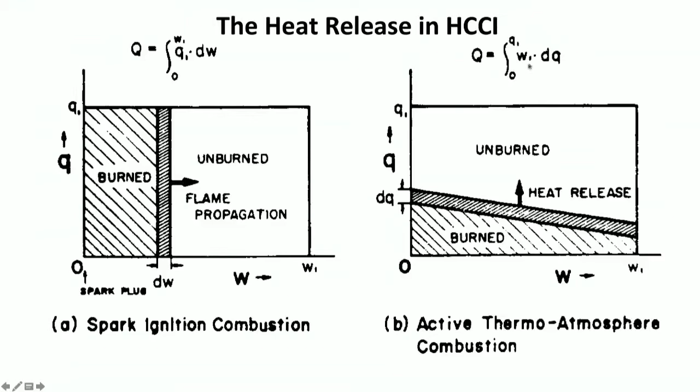So locally, reactions are fast, but the reaction front takes some time to get moving. So here to the right, it's what Onishi called active thermo-atmospheric combustion, ATAC. That's, by the way, what we called HCCI back in Lund the first 5-6 years before deciding on using the HCCI term. So here it's the same amount of heat, capital Q, integrating from 0 to q1 of w1 dq. So we integrate from bottom to top, and this tells us that things are happening all over the place - so it's a distributed reaction, no flame propagating through the combustion chamber. Chemistry is slow - it needs to be slow, otherwise all the heat is going to be released at one instant of time, and that's not an effective way to operate an engine.

Trust me, tried it. So for chemistry to be slow, we need to dilute. We need to have much more air, much more residual gas, much more something else that absorbs heat from the chemical reactions - slowing down chemistry by adding more mass. You can see that Onishi did not draw a horizontal line - there is a slope here. So it's... enough, maybe I should activate this.

It's enough of a slope to show that in some parts of the cylinder, more things are happening than in other parts. So it's not completely the same all over the place. Some parts would react a little bit faster because temperatures may be a little bit higher, a little bit richer mixture, or something is promoting reaction rate there. But it's not really exactly here or there, it could be some opposite location, some other cycle. But Onishi drew a non-horizontal line to indicate it's not a fully distributed reaction.

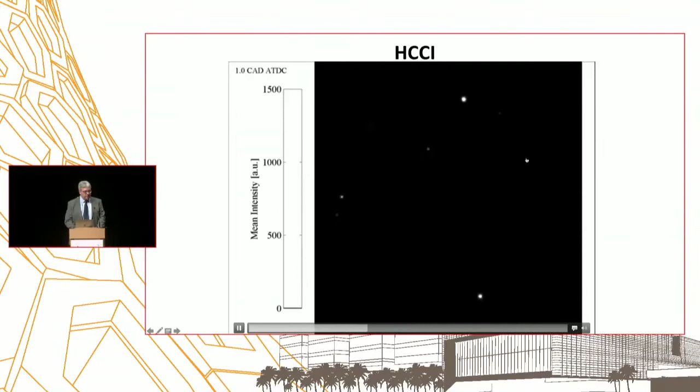And let's see if we can get the HCCI stuff working. Then nothing happens, because it wouldn't need to happen until it's close to TDC. You might see the number up there in the corner. And now it's about time to get started. You see it starts in one end of the combustion chamber, kind of does a loop, and burns a bit slower, actually, in the core of the combustion chamber. But distributed reactions seems to be the case.

So, what do we need to run HCCI? Well, we need temperature high enough to get combustion going, and then we need enough dilution so that once combustion gets going, it shouldn't blow up the engine. That's pretty much it.

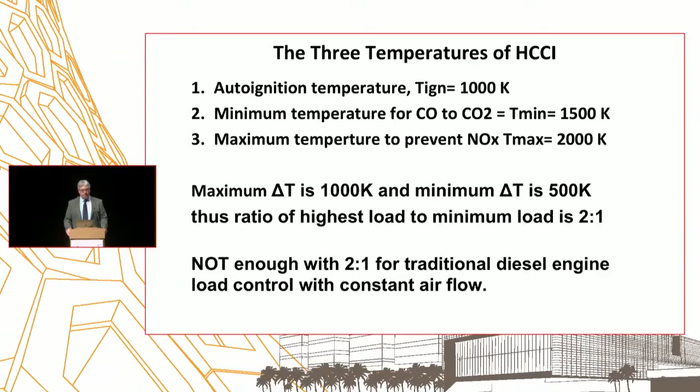So we can do really clean emissions, and then how about efficiency? If we want to operate our engine at part load, how should we do it to maximize efficiency? Well, we should burn fast at TDC. That's the ideal Otto cycle. It should be very lean. That's also good for the thermodynamic cycle, because the gamma, or ratio of Cp over Cv, would be high. We should have a high compression ratio, and we should operate very, very lean so we don't have any pumping losses. So we're doing all that with HCCI, so it's all good.

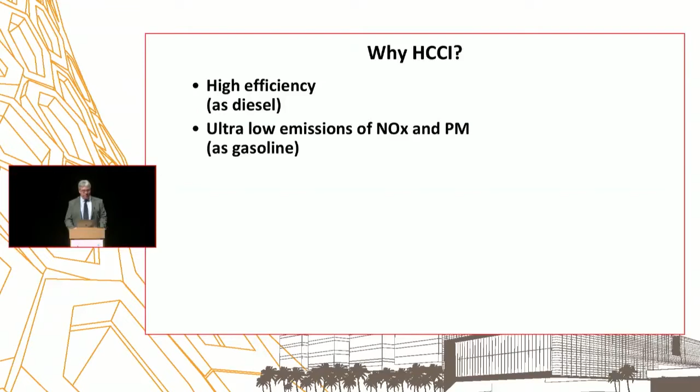So depending on who you ask, there will be different benefits. But it's kind of the best of both in one machine.

Oh, animation, question mark. Let's see if that works. This is an animation of HCCI. Let's do it like this.

And it means that this is pretty much a virtual HCCI engine. And what we're doing now is to set the different parameters that affect the HCCI combustion, so combustion starts earlier or later in the cycle.

So, when doing HCCI research, there are different ways to do it. You want to do thermodynamic engine studies, meaning you run a single-cylinder engine and you measure the efficiency, you measure the emissions, you're trying to understand why different variables affect the process.

With single-cylinder experiments like this, you could easily set conditions that would be totally unrealistic, and then get unrealistic results. Classical example: let's feed the engine with 10 bar pressure in the inlet, with no back pressure in the exhaust. Without burning any fuel, you get 10 bar work output. That's a really good efficiency—10 bar output without burning fuel. But it's totally unrealistic, so stay away from that.

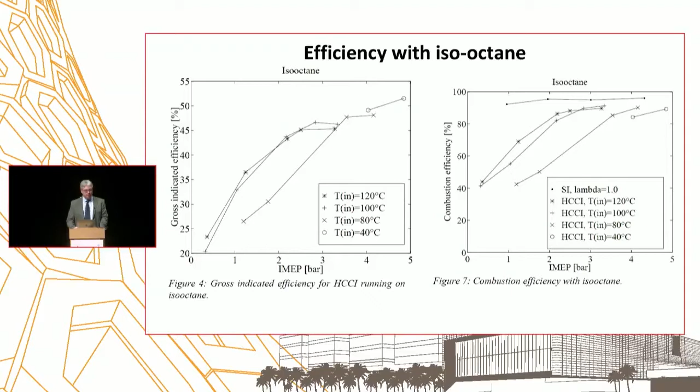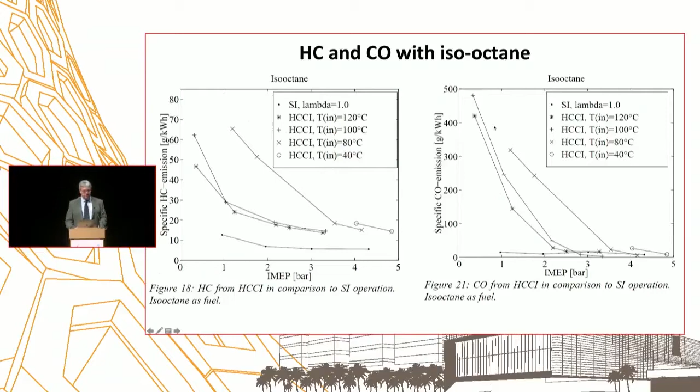So this would be the first experiments we did, and we just set a certain inlet temperature. We had a compression ratio that kind of worked, meaning the combustion phasing is totally random. This model I showed you was done way later, where we actually varied different combustion phasings and so on. Here it was only way early combustion, and that shouldn't be done.

So that was the first experience with HCCI, but it also gives you kind of a framework. Unburned hydrocarbon and CO would be high, NOx would be low, and efficiency would be high if you do it right, otherwise it's going to be a disaster. You've seen the free temperatures of HCCI before? Yes? Good. And that is still something that needs to be achieved.

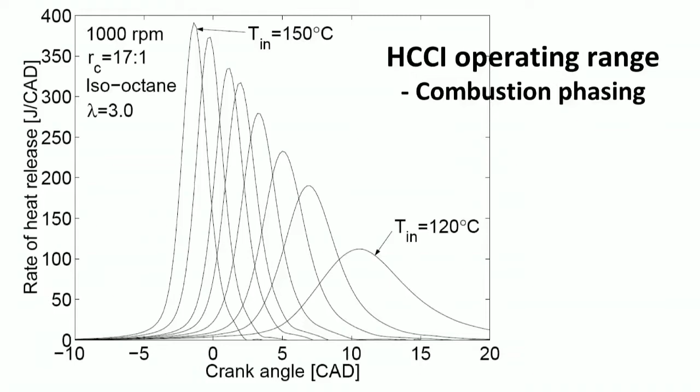Meaning that if we sweep the inlet temperature, combustion phasing will change quite a lot. This is a response from 150 down to 120 degrees in the inlet. It happens to be isooctane with a 17:1 compression ratio. So what this is telling us is that if we want a slow burn combustion, it should be a late burn. It also tells us that even if temperature starts to drop here at TDC, because as we compress, temperature goes up, and as we expand, temperature goes down.

But even so, there is something cooking here early in the process. So even with this very, very late combustion phasing, you release a little bit of heat before TDC, enough to get it cooking, and eventually it kicks in.

But the later you go, the more unstable it is. You saw that in the model - you get a lot of cycle-to-cycle fluctuations, because it's enough with maybe 1 degree C change in the inlet to have a really dramatic change in combustion phasing. So going early is safe, easy, but not as good. The better the control, the later you can go.

Combustion stability goes bad as you burn late. NOx drops as you go late, and unburned hydrocarbon and CO goes up. That's kind of what I already showed, maybe. So what's the optimum combustion phasing?

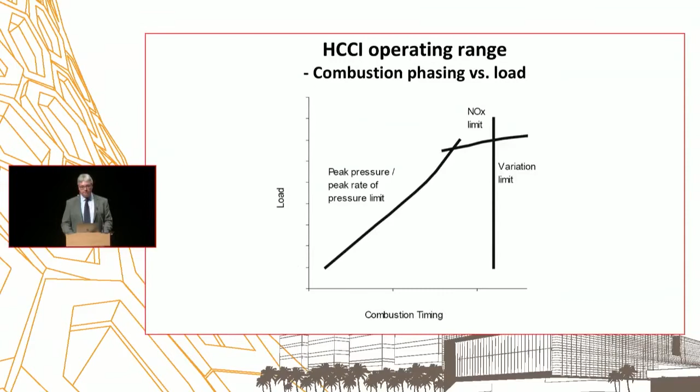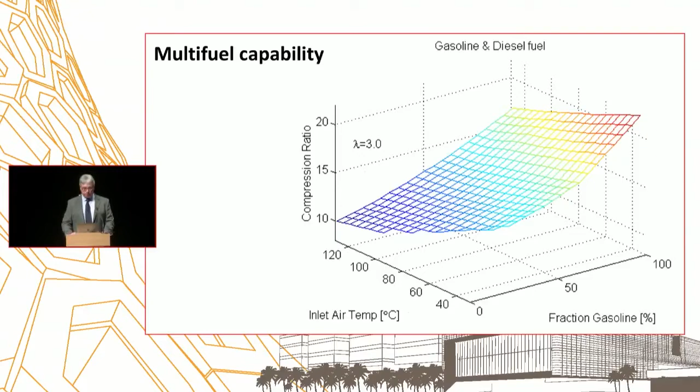The title of the slide says multi-fuel capability because if you adjust inlet temperature and/or compression ratio, you can run any fuel, right? Doesn't really matter if it's gasoline or diesel, you can burn any fuel. Any liquid or gaseous fuel - we didn't do any solids, I think, but yeah.

Hydrogen - at this time, 2004, there was a lot of talk about fuel cells. I'm not sure, maybe they're coming back, maybe not. It's batteries and fuel cells. Anyway, we decided to run HCCI with hydrogen. Is that a good idea? Well, the answer is, again, no. Hydrogen chemistry is very, very simple, so once the conditions are right, boom, and it's done. It's almost impossible to get late enough combustion phasing with hydrogen. It's very hard to get high efficiency because you're burning too early, and it's hard to actually get complete combustion, burning all the hydrogen with HCCI. But still, we did it - world first - but stay away.

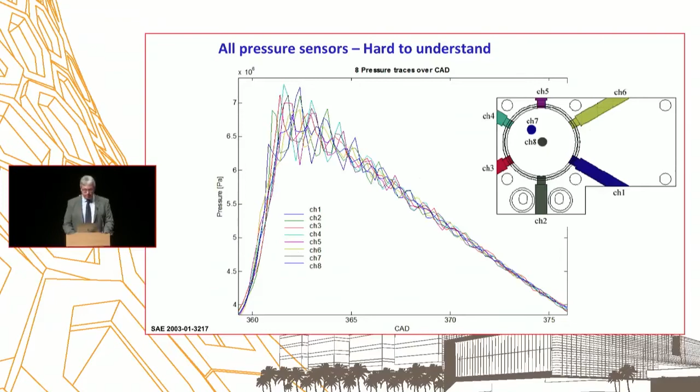So that's the conclusion. Well, the title says hard to understand. I possibly would agree. But if you look at a few at a time, like these 3 here, we see that they kind of go in phase. That indicates that there is a wave coming from the upper left to the lower right at pretty much the same time. And if we look at the other ones up there, they also go in phase. Again, an indication that the pressure wave goes upper left, lower right, and back and forth in that direction.

It's kind of interesting. This is one cycle, and that's a master thesis generating one cycle of pressure trace. Of course they did collect a few more, and if you look from cycle to cycle, you see that this is not at all the same process for the next cycle. Next cycle, it can easily be between channel 3 and 6, or it can be channel 2 and 5, or any other direction.

Totally random. But if we look at channel 4, 1, and 8, we see that it's really going in a very nice 180-degree phase. One goes high, the other one goes low. And we also see that in the middle, we measure a much lower amplitude, and we also measure pretty much twice the frequency.

By the way, this is really good to know if you want to get really high load from HCCI without too much pressure oscillations. What you do then is make sure that you fit the pressure sensor in the center, and you see nothing. We tried that and got really high load in a Scania truck size machine, just replacing the fuel injector in the center with a pressure sensor. That's the least sensitive position in the cylinder to put the sensor, and that also means for a certain maximum pressure rise rate, pressure oscillation, you can operate much harder.

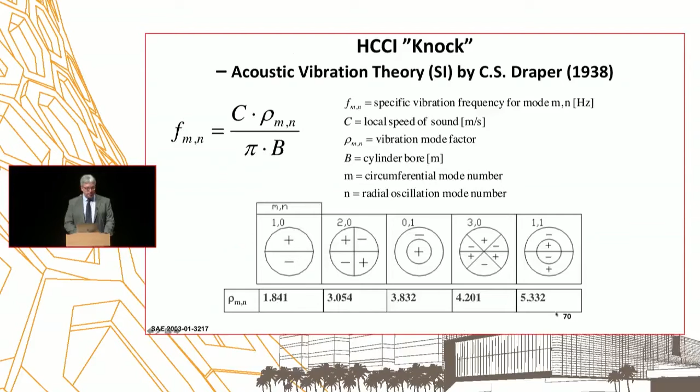Anyway, so this is the knock theory from 1938 from Draper, and there are different oscillation frequencies. You need to know the bore, local speed of sound, and I guess pi, as well as this mode factor. Depending on how the pressure waves go back and forth, you would then get the different frequencies. The lowest frequency here is this mode 1.0, just going back and forth like this, pretty much the mode I showed you, and is 1.8 here. Then you would see different modes depending on the complexity of the system.

This is the ringing index by James Eng. It's normally used to put a limit for any noise, and it's the pressure rise rate normalized by peak pressure, and then you have some temperature coefficients, saying that the pressure rise rate is more severe if the pressure level as such would be lower.

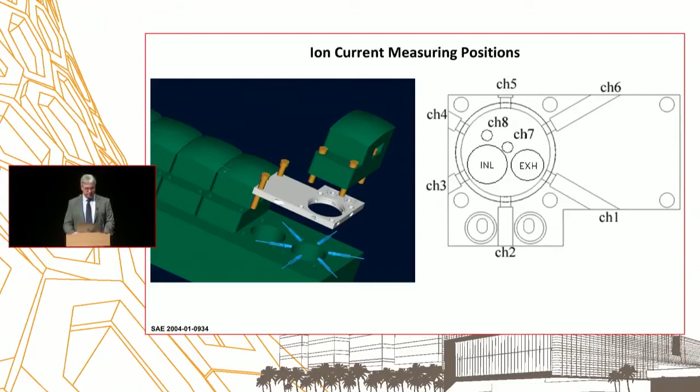So ion current was that - it's just to apply a voltage over the spark plug, and then you measure the current flowing as you change the conductivity of the charge.

Okay, basic studies, unburned hydrocarbon. Let's do that also before the break.

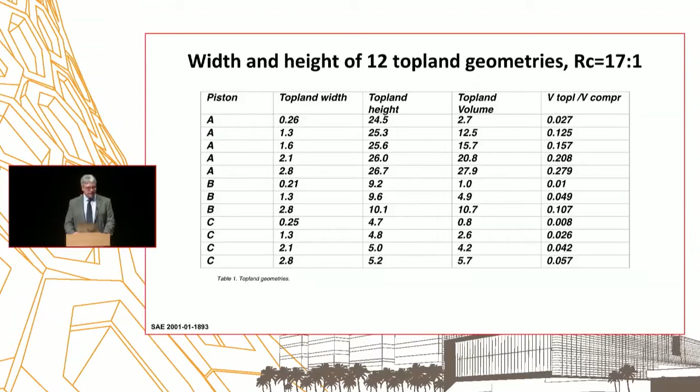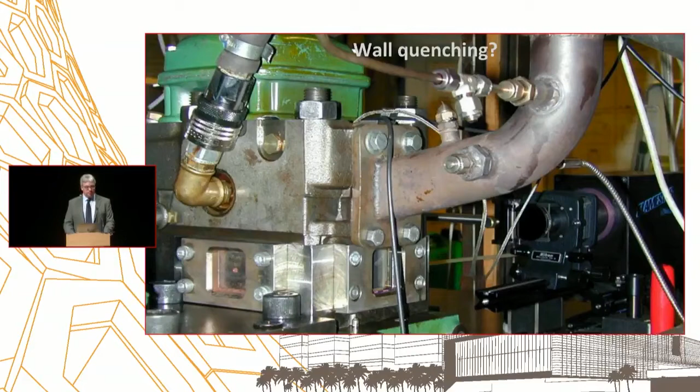So how about wall quenching? How can we measure wall quenching? Well, let's take some direct imaging.

So that's chemiluminescence. You only see that much with the camera. Let's do laser-induced fluorescence instead.

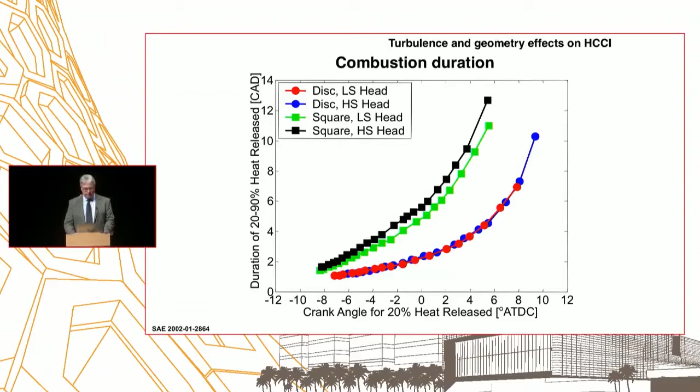So I can't blame the student. Then what? Time to think. It kind of hurts, but you have to do it, right? What can turbulence in the combustion chamber do to change HCCI combustion?

Could it be through heat losses? Could we be building up a different temperature field with different heat losses? If heat losses increase, the thermal efficiency should drop, right? So let's check that. Oops—the higher turbulence combustion chamber would have a higher efficiency with the same combustion phasing. Nope, so that wasn't really the case.

Okay, then what? What could it be? Could it be charge homogeneity? Turbulence is mixing, right? It's a good mixer. Could it be that the higher the turbulence, the more homogeneous the charge?

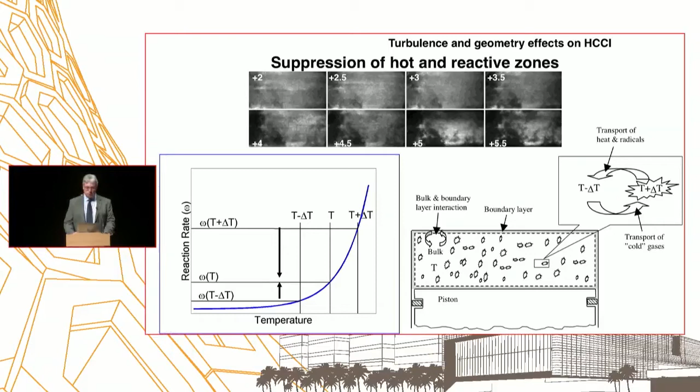Would that be a suitable explanation? Maybe. Why? How? What's happening? Let's do laser diagnostics. And I think this is possibly a really good time for a break.

How long of a break should I take? Ten. Okay, so back in ten.

So before the break, I said strange things happen in HCCI. Turbulence gives us slower combustion, and that's not expected. If anything, it would be nothing happening, or possibly a faster burn as in SI, but that's not the case. So let's figure out why, and there were some thoughts—most of them turned out to be wrong, but that's something that can be investigated once we look into the actual combustion process. And that can't be done with just chemiluminescence because we can't look into the combustion process as such; we can just look at the surface.

So what do you need to do laser diagnostics? Well, you need a laser, a camera, and an optical engine. In this case, it's a YAG laser with a dye, and just a camera set up for capturing a vertical laser sheet going through the optical engine. So that's the minimum requirement—those three components.

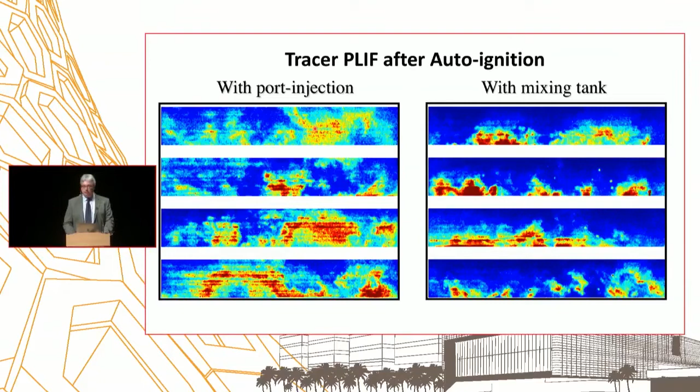This is fuel tracer LIF, and this is OH LIF, probing hot regions in the combustion chamber. Same story pretty much - there will be really high temperature zones with very steep gradients to zones with pretty much no reaction.

Why is this happening? Why does it look so totally random from cycle to cycle? How do we actually investigate the process? This kernel here, is it expanding? Is there a flame propagating? So is HCCI actually flame propagation? If so, why is turbulence reducing combustion rate?

The problem is that you can't really follow the average process. In spark ignition, you know combustion starts at the spark plug and grows, so you can do a sample average statistical analysis. If you take the average of all cycles, it will be just a homogeneous signal - a smooth surface. So on average it's really distributed, but a single cycle is not, and we can't follow the local individual process without a cycle-resolved measurement.

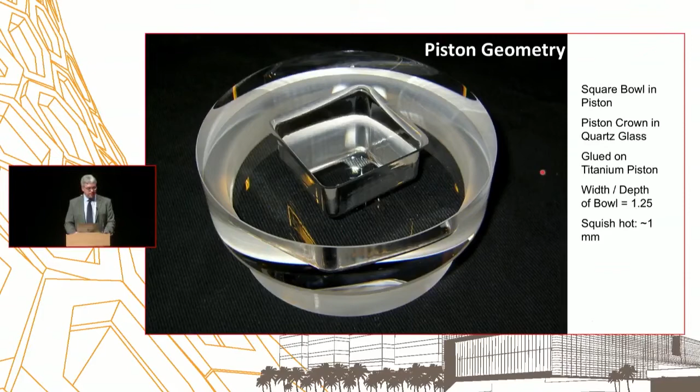Anyway, this is the pancake geometry, and the high-speed video is the same as shown in the introduction. It starts in the lower left corner roughly, and then progresses - you can see it here - then more signal will be in the center before completion.

These are the snapshots, and we can see it start here in many different locations - this is one single cycle. The next cycle will look different. You can see pretty much a hole in the center, then more of the signal in the center, and then it's done. The combustion process is in the range of maybe 10 degrees crank angle or so.

This is with the bowl, and here something else is happening. It actually starts in the corner, and then it's progressing, doing pretty much one revolution in the bowl. It starts in a spot and moves the reaction zone, and only very late in the cycle do you see combustion outside the bowl.

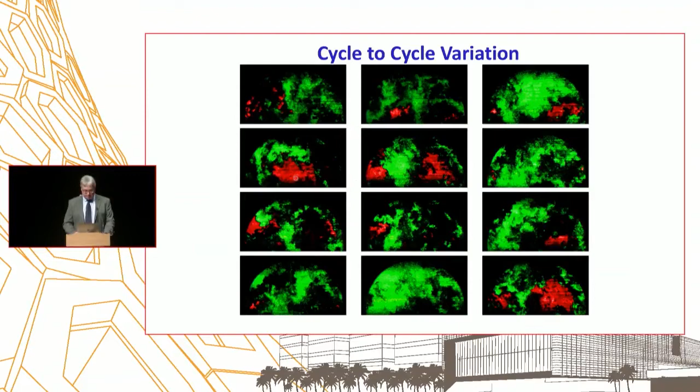Right, Hong? Good. So this is cycle-to-cycle variation, still experimental data. This is formaldehyde, and this is OH. Just showing that in a dozen or so different cycles, it looks very different. Why I'm showing this is because it justifies not using RANS type of models.

Combustion is not homogeneous. Again, this is experimental data, formaldehyde and OH, and this is the formaldehyde in the LES simulation and the OH, and also the temperature field, showing that it's not at all a homogeneous temperature field with HCCI.

Okay, all good. This is just to show that you see these structures also visible in the experimental measurements. So what's this? This is a progress variable of some sort, showing that here, the red, there is a lot more reactions ongoing or actually completed.

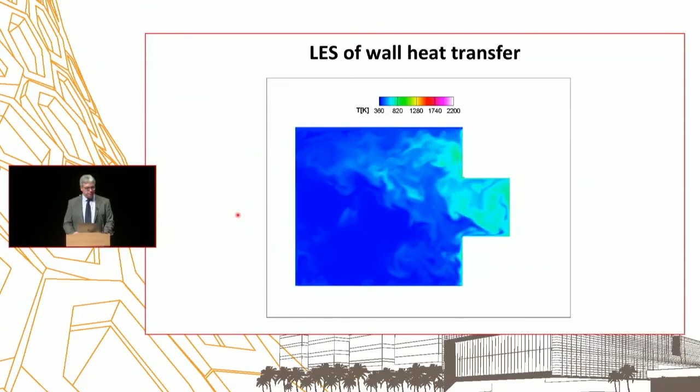So that was the final conclusion, why this strange combustion chamber is actually giving you a slower burn, behaving pretty much like SI. So this is the LES simulation of the same as the high-speed video, and we see it starts in a corner. For some reason, it starts in the lower right instead of the upper right corner.

We spent quite some time trying to figure out why the CFD predicted the wrong corner. Turned out to be kind of an easy way to explain it. This is looking at the combustion chamber from above, and the measurements were done from below.

So it's actually the same corner, but different view. Okay, enough of that. Let's do some closed-loop combustion control. I said without it, the engine explodes in a few seconds. Why do we want to do closed loop control? We want to burn as much fuel as possible to get a higher load of HCCI.

So this is kind of the limit, and this is something I showed previously. If we burn late, the burn rate is less, and that means we can go up in load. So let's phase combustion late. But that also makes the entire system very nervous. So we need to measure what's happening, and we need to adjust something for the next cycle so we stabilize.

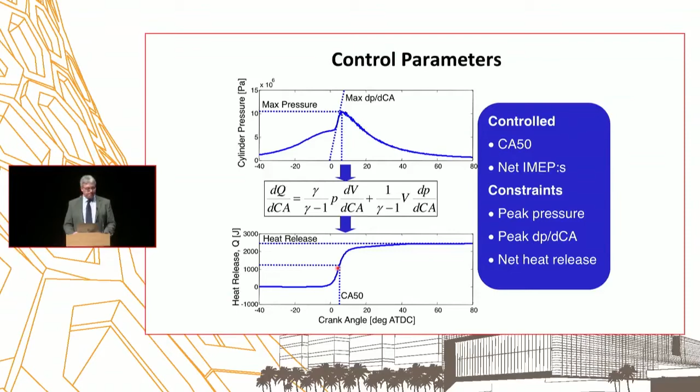So, how can you control the HCCI? Well, you can do this dual fuel, meaning blending isooctane and n-heptane. So this is done here in a Scania multi-cylinder truck engine.

You can do variable valve timing, meaning that you can change when you close the inlet valve, and by that you effectively change the compression ratio, the effective compression ratio. You can also change how much you trap residuals with the valve timing. I will show that a little bit more in detail eventually.

That's done here in a Volvo car inline 6. The previous one was a Scania truck. And this is with the variable compression ratio and inlet temperature control.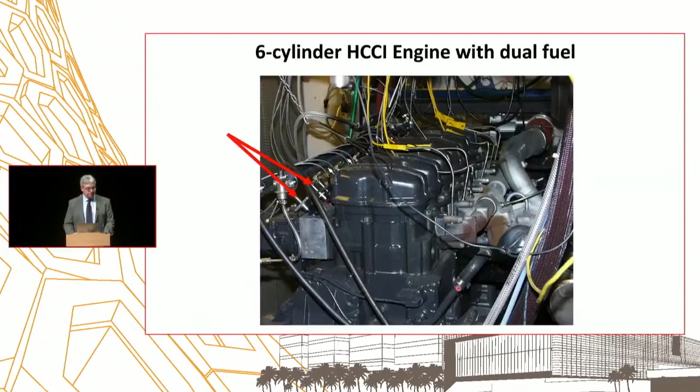That's roughly 90% of the diesel engine peak power. Without closed loop control, the maximum load will be around there, roughly. So you do not try to go high load without closed loop control, you're simply not fast enough to control it yourself. And if it's a 6-cylinder engine, you need 7 students to control it - one per cylinder, and the 7th one to control inlet temperature. I don't see that happening easily.

So this is a typical cycle with this closed loop control, 20.4 bar IMEP and 17 bar net with gas exchange. We're hitting 200 bar peak pressure because the engine supplier, Scania, told us not to go above 200, so of course we didn't - too much. This is of course the published data. There were some excursions to 250, 300, and yeah.

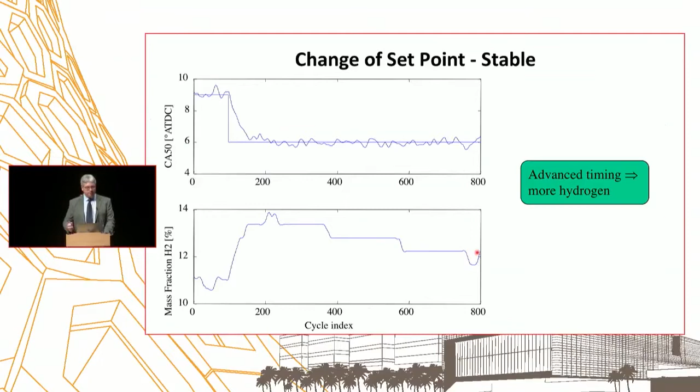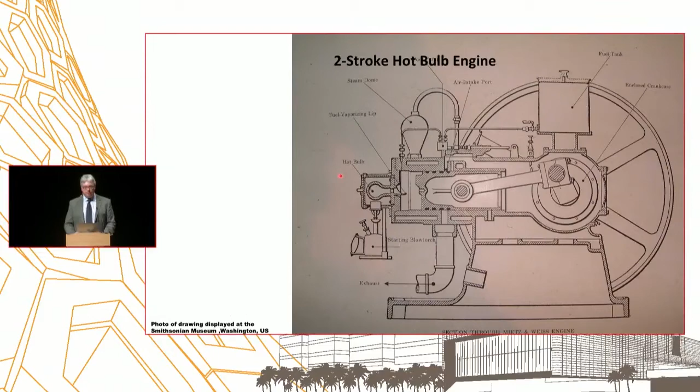But it was very robust and worked very well. No spark plug that fouled, and it could burn cheap fuel like kerosene or naphtha.

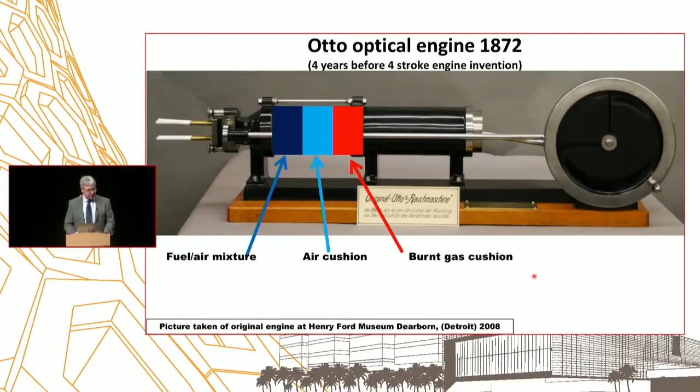Diesel, the other guy, when he did his experiments, concluded that combustion started when reaching 20 atmospheres pressure. That was a bit of a surprise, since that was during the compression stroke, and he injected fuel at TDC - so combustion started before he injected fuel.

He tried a few times, and if you try and try and try, you add fuel, you add fuel, eventually you have enough to do HCCI. So diesel almost got killed by the HCCI engine, in a sense that the combustion got so violent the safety valve flew off and landed in the wall, half a meter away from diesel himself. If he would have been in that location, I guess HCCI would have killed diesel.

Okay, enough of that. Let's look at some more practical paths. A lot happened in 1998. Honda released their commercial 2-stroke running HCCI. Nissan released the MK combustion concept - K stands for Kimura, I still don't remember the M. Kimura himself was here a year ago giving a talk at KAUST. Unibus was released by Toyota. Ford presented a concept with OKP, and the VCR thing with Saab together with Lund was at the same time.

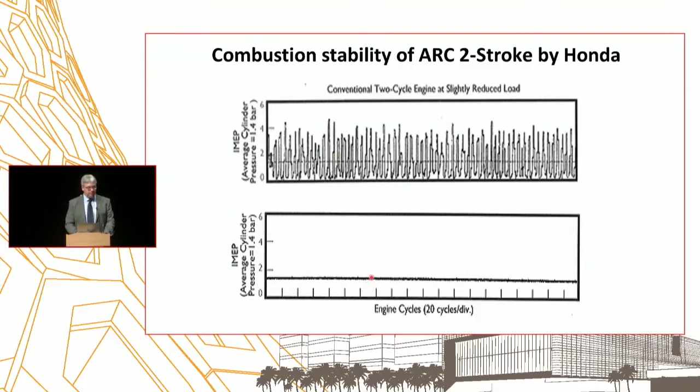Okay, so this is combustion stability. This is the standard SI combustion, and this is HCCI. As you can see, it's very much more stable with HCCI. So we didn't trust Honda, so we took one of those, and this was a master project.

So take the scooter, mount it in the test bench, add an emission analyzer, and then measure the CO, NOx, unburned hydrocarbon, and the fuel consumption. And yeah, we got kind of the same numbers as Honda. So seems to be about right.

This is just a zoom in, and sure enough, the NOx level - there is no major difference if you do SI or HCCI. Fuel consumption is improved, but the main conclusion is there is no NOx benefit doing two-stroke HCCI. Unburned hydrocarbon is 30% less, but still high, and much better combustion stability at low load. Brake efficiency is improved, but it's still less than 20%, so who cares.

It's not good. Then someone got the idea of, if we can do this in a two-stroke, how about doing it in a four-stroke? So how about converting a four-stroke engine to the same conditions as ARC?

Let's keep the compression ratio about the same. Let's not heat the inlet air, but let's trap a lot of hot residuals by closing the exhaust valve early and opening the inlet valve late. It's called negative valve overlap, meaning no valve overlap. Doing so, we trap hot residuals and get the same in-cylinder conditions as the two-stroke. The only thing we need to do is change the valve timing, and then a conventional SI engine, all of a sudden, will be HCCI.

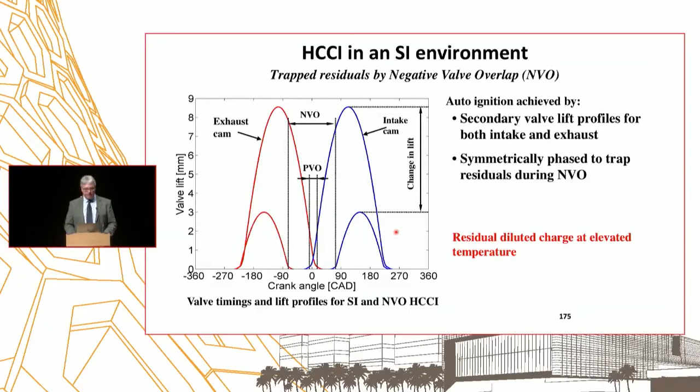You can also convert gasoline to diesel by injecting fuel at the wrong TDC, because if you close the exhaust valve, you get a recompression.

That means at the wrong TDC, temperature and pressure are fairly high, not quite high enough for combustion, but high enough to get the fuel cooking a little bit. So if we inject the fuel here, we actually convert the low reactivity gasoline to high reactivity, something diesel-like. So if we inject a certain amount of fuel here and the rest where we normally do, we can balance and adjust the fuel quality by simply selecting when and how much we inject the fuel. And then we have another control variable.

So that seems to be doable. We tested it in this inline 6 and concluded that, yeah, it's kind of possible, but you either get 4-bar IMEP at 1,000 RPM or 1 bar at 4,000 RPM. So it's kind of the same power.

Why is that? Well, it's because there's really one setting that gives you the right balance between dilution, meaning burnt gases, and temperature from the exhaust. And that's pretty much only one power rating of the machine. So IMEP times speed gives you power.

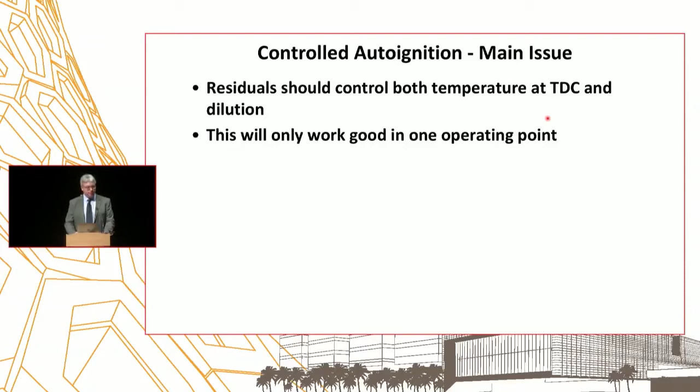Okay, enough of that, and the VCR, a much better solution. You can run any speed load point by adjusting, and you have then an independent control of temperature and dilution, and that gives you a much higher efficiency.

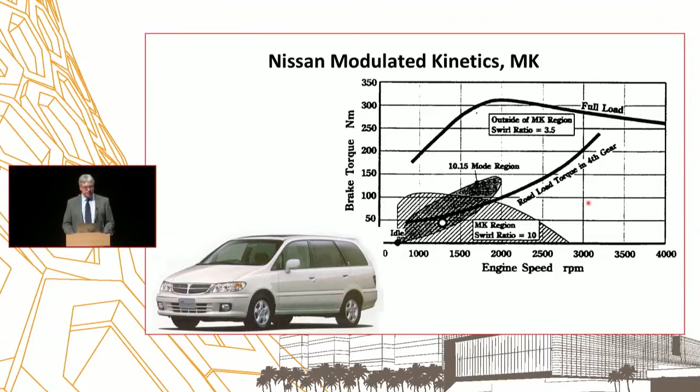Okay, the diesel concept, Nissan MK, they can do it at part load. And how do they do it? Well, first, it's been in production since '98. I think there are still versions out there. And the basic idea is to mix fast and slow down chemistry.

And mixing fast, you do with a high swirl level. So they have up to 10 to 1 in swirl, really fast rotating flow in the cylinder, and that's much higher than the normal 3.5. 3.5 is actually fairly high as well.

But there are 3 steps Nissan takes to get into the MK operating range. First, they reduce the amount of oxygen in the inlet, meaning using exhaust back into the inlet. So from 21 to 15% oxygen concentration, that's step 1.

But doing so, you increase unburned hydrocarbon and you increase soot quite a lot, even though NOx drops by a factor of 6 or so. Then they retard injection timing, and by that you increase unburned hydrocarbon even more, but you drop in soot. And then the final stage is to apply this high swirl combustion concept.

And then finally unburned hydrocarbon drops and the soot goes down to very low numbers. So by doing all 3 steps, you can reduce unburned hydrocarbon, NOx, and soot, all 3 at the same time. But you need to do all 3 steps, otherwise it's not very good.

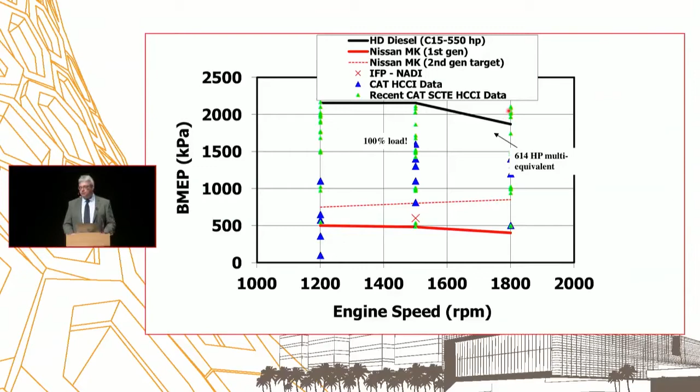So what's RCCI? RCCI is a version of HCCI with an R in the beginning. This R stands for reactivity controlled, or possibly it's because the inventor is Rolf Reitz. So why is it not called RRCI? Well, you need to ask him. I did, he didn't really answer me.

The basic idea is to do HCCI with two different fuels: a high octane number fuel in the inlet, and a high cetane, or low octane, fuel injected during the compression stroke. By doing so, changing the ratio of high and low octane fuel is the same as I just showed in the controls chapter, changing the octane number based on operating point.

But doing direct injection of the high cetane fuel also means you would have a stratification in octane number in the cylinder. In some regions it would start to react, and in other parts it would not react as fast. So the normal setpoint is most of the fuel port fuel injected, or very early injection, and then two injection pulses, one at 60 and one at 30 degrees before TDC, with the diesel-like fuel.

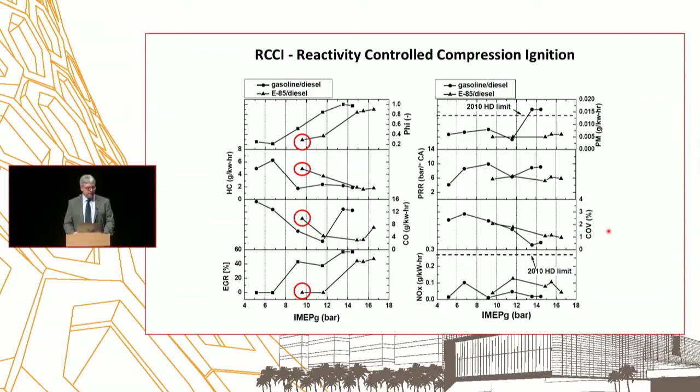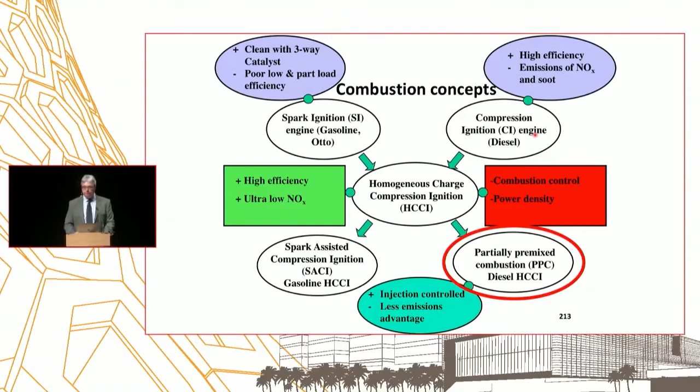Doesn't really work well, so let's go to PPC instead. PPC is one step back, but it's also boosting efficiency. With HCCI, maybe 47% indicated is where you're going to be with realistic conditions. With PPC, it's 57%. So it's a significant step forward - as big a step from SI to HCCI as from HCCI to PPC.

As I said, 57% efficiency, and that's with a suitable fuel - a low octane number gasoline. So you should operate the diesel engine on gasoline to get the best possible efficiency and to maximize the benefit of this partially premixed combustion.

If you wonder about the numbers here, these are different fuels from Chevron. This fuel is number 47,333 since they started to blend fuels at Chevron, and that happens to be a low octane number gasoline.

Okay, for the PPC part, this is the idea - first HCCI and fuel efficiency. I haven't really talked about efficiency much since I showed the results from the first paper, so let's do that first, and then what is actually PPC? Why is gasoline the best possible fuel for a diesel engine?

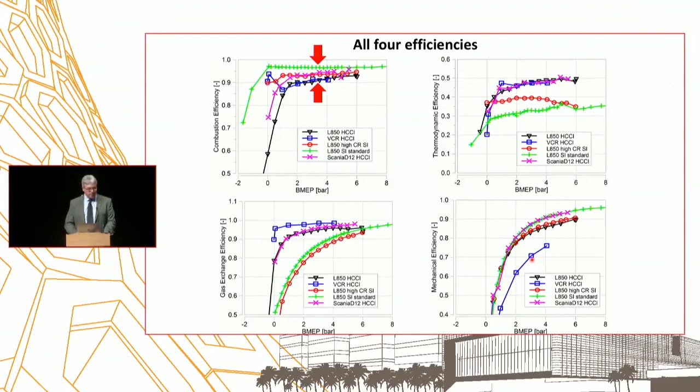So the problem with HCCI is that it's burning too fast. We see it's in the range of 5, maybe 10 degrees crank angle burn duration, and that's too fast. That's giving us too much noise, too much heat transfer, and we really don't want to go that fast. We would like to go slower, but then it's extremely sensitive and very hard to control.

So what we would like to do instead is partially premixed combustion. With PPC, we can put the correct combustion phasing with the correct combustion duration, and we can design that by injecting the fuel at the right time and at the right rate. So we can actually engineer our heat release curve as we want it.

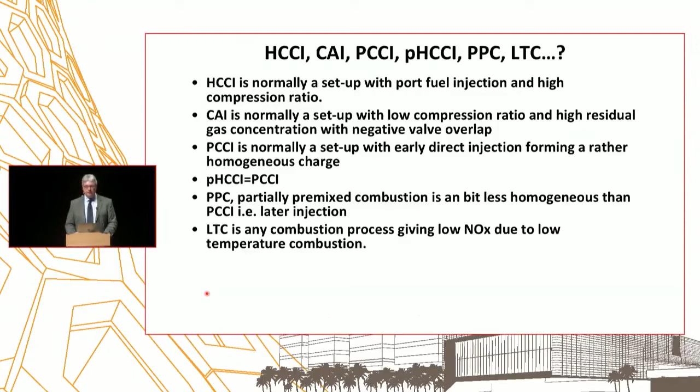So why call it PPC? Why change this? Well, it's because before 2008, we published some papers we called Stratified Spark-Assisted HCCI. So wait a minute - so it's stratified homogeneous, and it's spark-ignited compression ignition. So PPC is more of a neutral, easier word, because it's partially premixed. So it's kind of mixed, but not quite. And the C is combustion. And well, if it's not combustion, it's kind of boring anyway.

Anyway, this stratified HCCI, we published some data on it. We did OH and formaldehyde LIF. Basic idea: take 2 cameras, 2 lasers, and get 1 picture of each, using an optical engine with different operating modes.

So formaldehyde is used to detect things that are warm, and OH to detect things that will be hot. So fuel LIF is kind of cold stuff, formaldehyde warm, and OH hot.

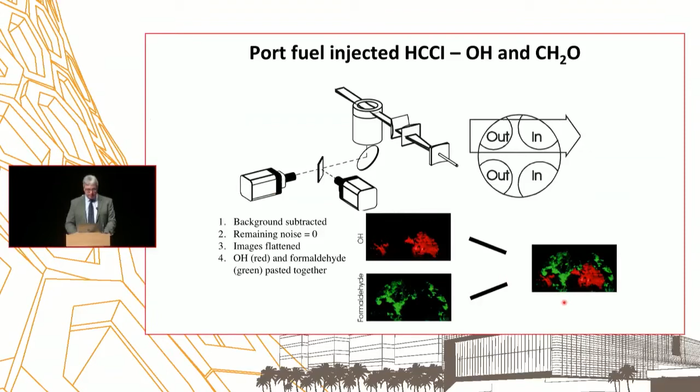So first we did fully homogeneous charge, and these will be the two pictures combined: OH in red and formaldehyde in green. Then you just combine the two, and it can look something like this.

During the process, the black is this typical two-stage heat release as you use N-octane. It starts to burn, then it drops, and then it goes up again. Here you can see the formaldehyde being formed, mainly in this low temperature reaction zone. The formaldehyde drops as the OH increases, and we see both at the same time.

But from the images we can see that they're never in the same place. You can see formaldehyde being formed, covering pretty much the entire field of view. There are islands without formaldehyde. In those holes the OH is showing up, and then it starts to dominate the process.

Again, not homogeneous combustion. So this is a port fuel injection, and this is just the formaldehyde surface. We calculate how much of the field of view is covered by formaldehyde. From here to here, the entire field of view is covered with formaldehyde, and then it starts to disappear.

So that means if we say, at 7 degrees before, the entire field of view is covered with formaldehyde, it is a homogeneous mixture. A good indication of HCCI, right?

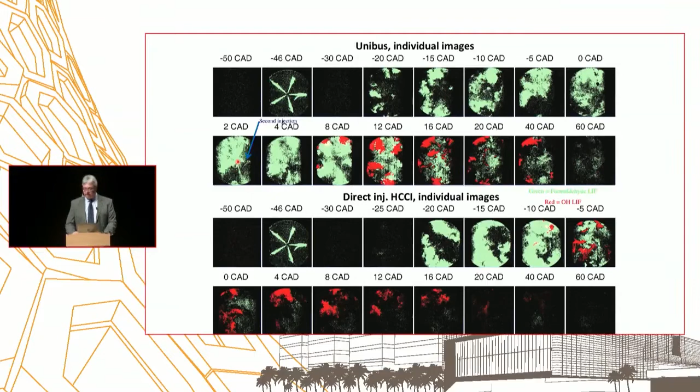And this is the unibus with the second injection here, and that's even a less homogeneous signal.

So this is injecting at -80, and again, it's fairly homogeneous here at -7, but not quite, and then the OH kicking in. At -46, you can see the 5 individual sprays, and it's less homogeneous for sure. You might also see that the OH signal is a little bit brighter, so there is more OH indicating a hotter combustion.

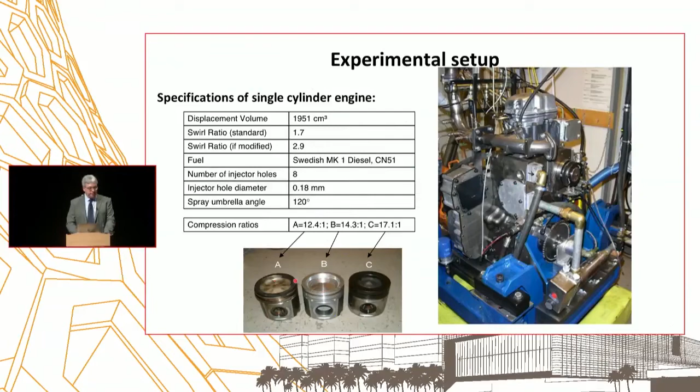So what we do is take a single-cylinder diesel engine, with 3 different piston bowls with either 12.4, 14.3, or 17.1 compression ratio, and this one happens to be the standard one, I think this is blown up here. So that's the standard compression ratio piston. This is then a more wide bowl, and this is an even lower compression ratio bowl.

And then let's do this with different loads, 8, 12, and 15 bar. Let's adjust inlet pressure, and let's do an EGR sweep. The EGR sweep is done like this: we add more and more EGR by replacing air with EGR.

So that means that the lambda goes from a really high number down to 1, stoichiometric diesel combustion. And that is then in combination with a really high EGR level. So why are we doing that?

Well, we're doing it to slow down chemistry. So we want to inject the fuel and then burn, separating fuel injection from combustion. And we can do that on this right-hand side of the soot bump.

We see that with high enough EGR levels, with the low and medium compression ratio, we can get very low soot with really high EGR. It first increases very much and then it drops. It's not the case with a high compression ratio—then it just goes up and goes to infinity pretty much, and that's too high.

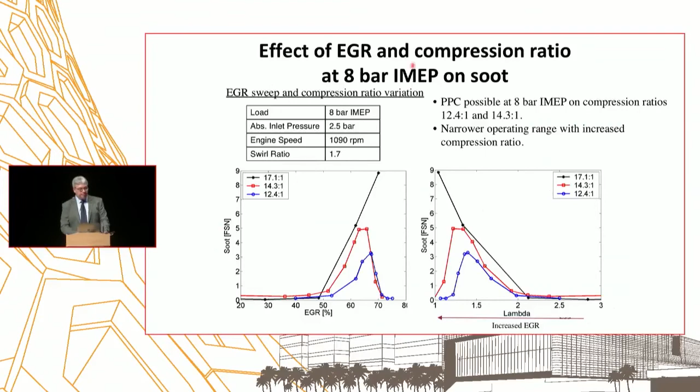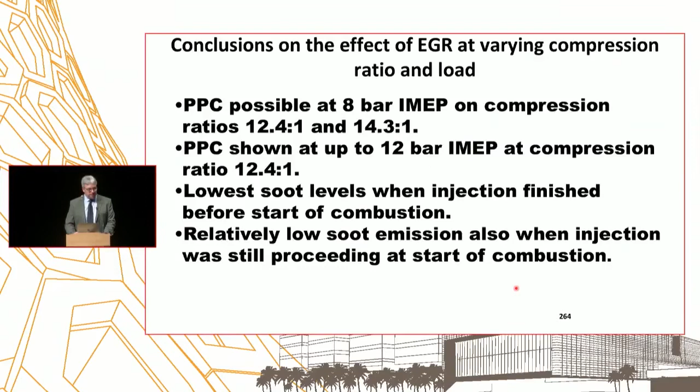But you're not really able to separate fuel injection from combustion here. So you're doing all this. Why? Well...

You can suppress emissions, but you're going to pay a heavy penalty in the fuel economy. Low compression ratio means bad thermodynamic efficiency. Low combustion efficiency, you're not burning all the unburned hydrocarbon and CO. Gas exchange efficiency is not great if you're going to have 75% EGR. And you need to go fairly low load, which means mechanical efficiency is quite bad. So this is the high efficiency concept, right?

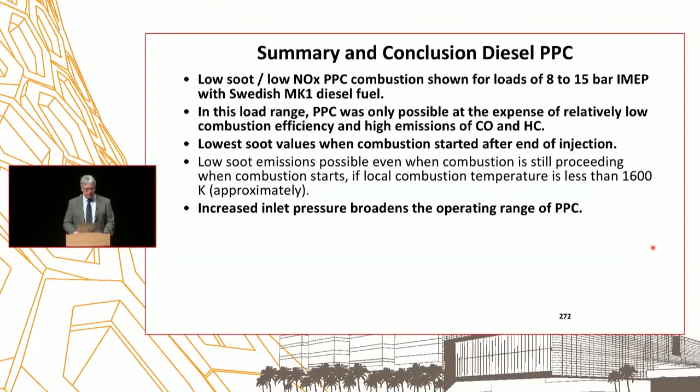Something is wrong here. Well, the thing being wrong is the fuel. You're really limited if you're going to do diesel fuel to this load range here.

And if you swap to gasoline, this is what's happening. All of a sudden, the fuel is designed not to auto-ignite, and that means you get a lot of time, maybe even too much time. So this dotted line is the fuel injection, and this is the combustion.

And is it enough with 50% EGR instead of 75-80%? You can bump combustion efficiency to 97 or so from below 90. I will show even higher soon enough. 8 ppm of NOx, that's good enough, and soot 0.2, also quite good. So all of a sudden, everything just kicks in by replacing the conventional diesel fuel with gasoline.

So let's do that. The first we did was in a light-duty engine, and this is a Volvo D5. The number is, well, it's a 5-cylinder.

Here we are not doing a single injection, we're doing a triple injection. We inject at -60, and if you remember from the optical diagnostics, that's the last time you can inject and still get a homogeneous mixture. So this is kind of an HCCI pulse. This is when injection happens, that's a control and pretty much a diesel injection pulse, and this is a bridge in between. By playing with how much and when you inject these three, you can change the heat release.

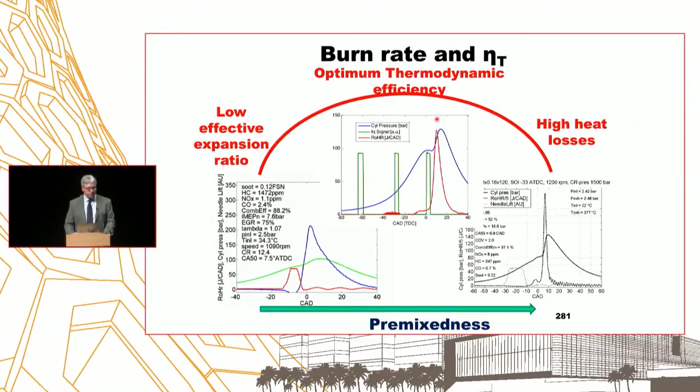So that was the car size. Now it's time for the truck size. Same engine as used for the diesel experiments, but let's feed it with some gasoline.

In comparison to a conventional diesel engine, it's a fairly narrow spray angle. So you shoot in the fuel, and this umbrella angle really determines when you're going to hit the bowl as you inject the fuel. If you have a narrow angle like this, you're going to hit the bowl even if you inject fairly early. If it's a very wide angle, you have to wait close to TDC until you inject, otherwise you're going to hit outside the bowl. And yeah, we also bumped the swirl number a little bit.

The two bowls as used before, intermediate and high compression ratio. I guess the intermediate is now called low compression ratio. And 2 injections instead of 3, well, the system couldn't really handle 3. But 1 at -60 and 1 close to TDC. This -60 wouldn't work with diesel fuel, because if you inject diesel fuel here, it will simply ignite and burn, and that's not very good.

So, high compression ratio piston data first, and what I'm going to show is a load sweep at 1300 RPM using the recipe of PPC: 50% EGR and lambda 1.5, and low inlet temperature, 308. So this is the load sweep, and this is the fixed inlet temperature, and here's the resulting exhaust temperature, and this is the inlet pressure and exhaust back pressure as set in our system. And as I said, lambda and EGR should be kind of the same at all load points.

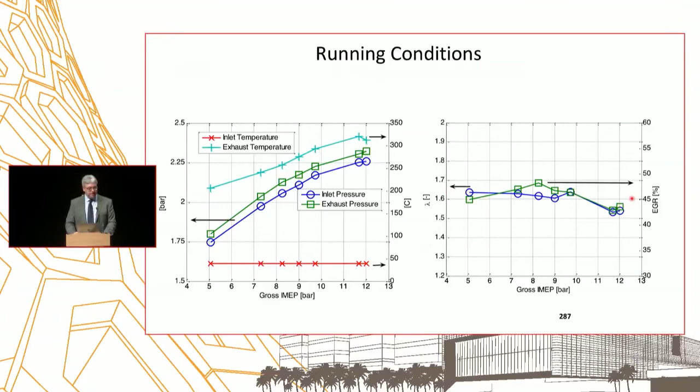Okay, let's skip that. So this is then the resulting efficiency, or efficiencies. If we start with the combustion, it's 99%, so it's an order of magnitude better than HCCI. Only 1% of the fuel is being wasted, not burnt. This is the 57% thermodynamic efficiency with an optimized combustion at intermediate load. And then it's the parasitic losses, meaning the gas exchange and the mechanical losses. We see that both would be better as we go up in load.

So why did we stop at 12? Well, it's because we are running out of ignition delay. We cannot inject all the fuel before it starts to burn, and we are running out of dilution. So time to stop at 12 bar. HCCI, as I showed previously, the graph was up to 6, so this is at least a doubling of what could be achieved with HCCI.

So this is another way to plot it. This is gross indicated efficiency, so it's combustion plus thermodynamic efficiency. Then you add the gas exchange losses and the friction losses, and we see that the brake efficiency will be 48, 49 or so, and kind of flat.

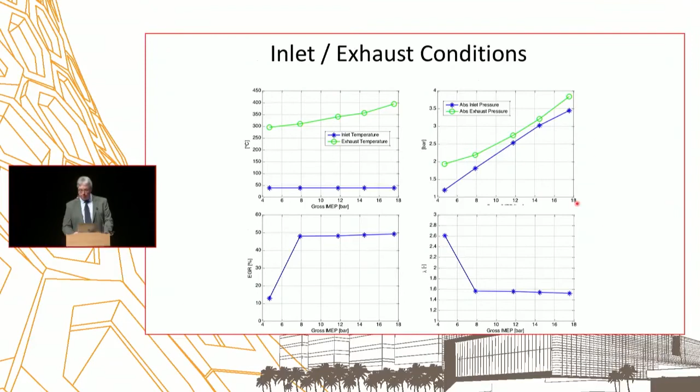So why is 55 better than 57? It's because as we reduce compression ratio a little bit, we lose in thermodynamic efficiency, but it also enables us to go higher load, because lower compression ratio means a little less temperature, and that means we can go to 18 bar instead of 12 bar. That enables us to get higher efficiency, as the parasitic losses will be less dominant at high load.

Combustion efficiency is 99.9, much better than before - actually an order of magnitude improved again. So HCCI was 90, the high compression ratio piston was 99, and now it's 99.9. That means unburned hydrocarbon and CO are below legal limit without after-treatment.

There is no bump here at 57 at the intermediate load with the lower compression ratio, but we can maintain 55 all the way from low to high load. So that's good.

This is just a summary in different ways - gross indicated, net, and brake efficiency, and we see that we're approaching the 50% point with the brake efficiency. Again, some exercises with different losses, absolute numbers relative to energy input, and a colorful graph showing the sum being 100%. Can be used for a more detailed analysis of the results - I'm pretty sure you don't want that.

Emissions - again, hitting the legal limit at 18 bar, and below that, no problem really with NOx. Unburned hydrocarbon creeping down below the legal limit, CO well below legal limit. Soot is a factor of 4 less than previously, but maybe not good enough anyway.

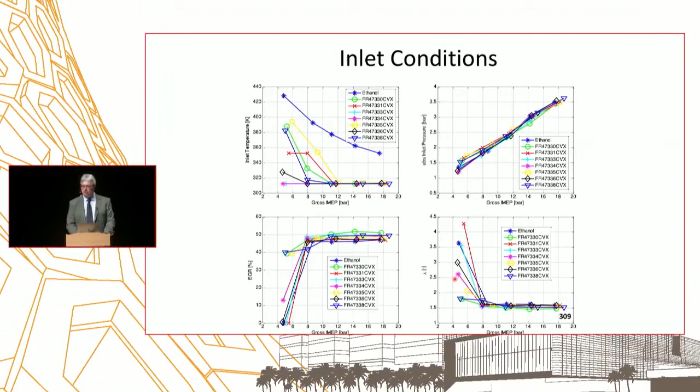We also changed injection strategy quite a lot when changing fuel. There were two fuel injections: first, close to 60 degrees before, and one close to TDC.

We can see that with ethanol, for instance, pretty much all the fuel goes in 60 degrees before, and a very small amount—actually here at low load, none, but then a small amount at higher loads. Other fuels would have no fuel at all in the pilot or early injection; all the fuel would actually go in the second pulse.

This is to adjust the combustion for octane, or should I say the opposite, how to adjust the thermodynamic cycle based on engine and fuel octane number. But if we do it right, we get pretty much the same thermodynamic efficiency, plus or minus a percent or so, with this re-optimization of the process.

If we would not re-optimize, this would be all over the place with really bad excursions. Oops, like this one—that didn't go very well because it's not a fully optimized point.

So this is thermodynamic efficiency. I said 55 before for one fuel, and you can see it's from 56 to 54 for pretty much all the data points. So the fuel I picked previously is in the center of the bunch here.

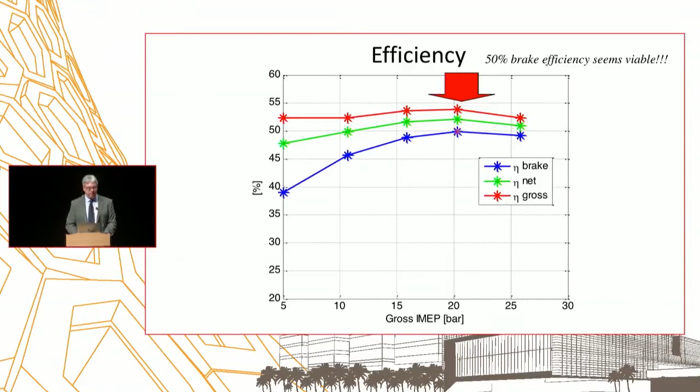But even so, we did some experiments, and we were up to 26 bar IMEP, and as you can see, we're hitting 50 brake. So less difference from gross to net to brake with this more modern engine, with better gas exchange, a better injection system, and so on and so forth.

So this is the intermediate. Combustion efficiency 99.9 as before, and the parasitic losses much less dominant with this modern machine. So actually the thermodynamic efficiency is not improved compared to the older one.

So this is a load sweep, or actually 5 different loads, just to illustrate how things change as you go from a low to a high load. I'm not going to show each and every one here—I'm going to show one at a time.

So quite a long ignition delay, and it's quite a homogeneous combustion, more close to HCCI than diesel. Low NOx, 0.1, and very low soot, and efficiency should be—well, it's only the combustion efficiency, but it's good.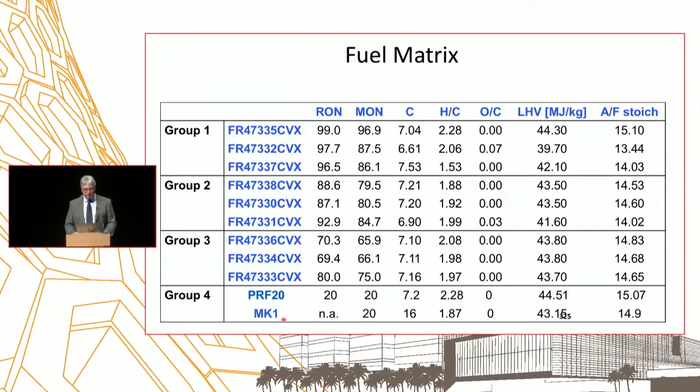But you can actually do the same with low octane gasoline. So you can go from the lowest to the highest loads with 70 octane gasoline. Not so easy to do that with racing fuel, meaning like 99 octane gasoline - then the minimum load is like 15 bar, which is a little bit inconvenient. You can always say to the police that, sorry, I couldn't go low load, I couldn't really reduce engine power, so I had to go really fast.

It's not going to work. So it would be convenient to be able to go low power, low load, also with high octane fuels. And that's, I think, the last part of my talk: how to go down to low load with too high octane number.

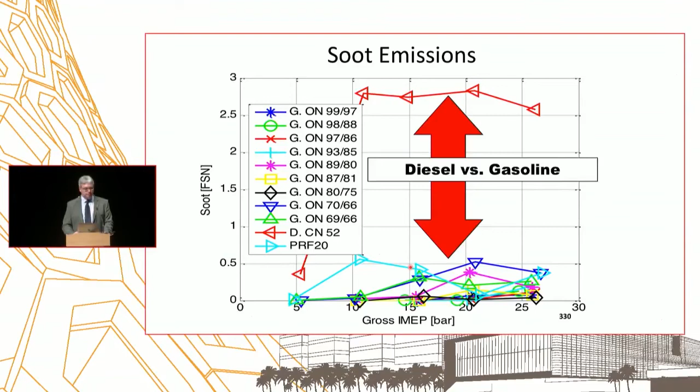PPC and fuel efficiency, should I do that? Yeah, sure, let's do it quick. Let's optimize efficiency - and how should we do that? Well, first you need dilution, you need to burn fast, and you need to burn complete. Then you get efficiency.

So that seems to be the way to do it. Add more dilution. Why? Well, if we look at it, it's mainly the heat transfer losses dropping. Because adding more dilution means less temperature after combustion, and that gives you less heat losses. Not so much difference in exhaust losses.

Is that true? Well, let's do inlet pressure sweep, same Scania as before, the D12. And sure enough, this is low inlet pressure, this is high inlet pressure, and we go from 45 to 55% indicated efficiency.

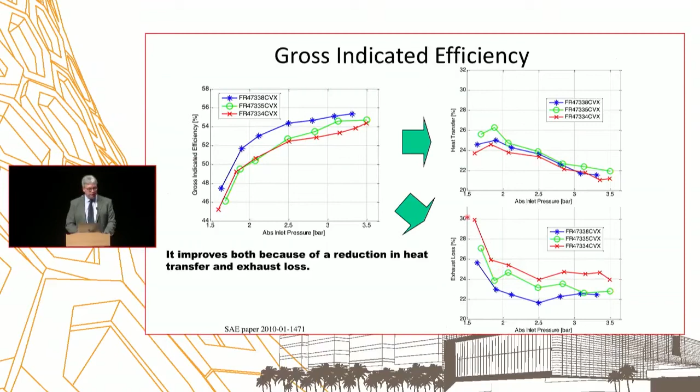The numbers again, different fuels, slightly different response, but not much. Why? Again, heat transfer losses really dropping, exhaust losses dropping at first, but then staying the same. The bumping up here is because this is close to stoichiometric combustion.

So that's using additional air. How about using additional EGR? Same story pretty much. If we have a certain amount of fuel, certain amount of air, and just add an additional component, that's EGR, what's going to happen with efficiency?

Well, this is how you do it. You increase by adding higher and higher inlet pressure, so the partial pressure of fuel and air is the same, and then you add a partial pressure of exhaust, keeping lambda constant. And what's going to happen? Pretty much the same story, from 51 to 56. So again, from kind of lukewarm results to really good results by simply adding more dilution.

So, of course, there are people doing extrapolations saying, at what EGR level will we have 100% efficiency? It's not very easy, right? It's hard to get more than 100%. So why? Same story again, heat transfer losses dropping, some exhaust losses as well, but not as much. And yeah, you have some side effects, NOx dropping in order of magnitude and soot going up, and combustion efficiency drops if you go too much.

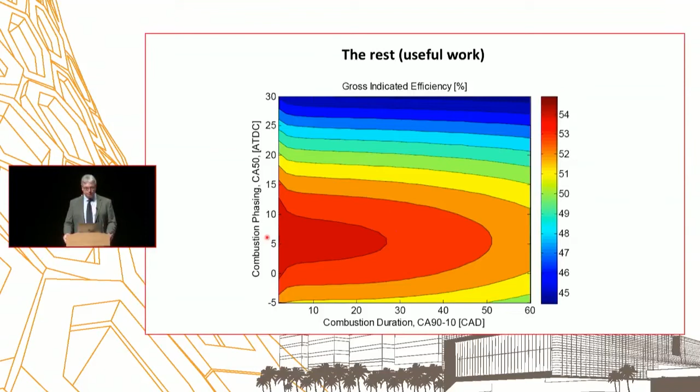So that was back of the envelope calculations, and of course they're correct, but should we verify maybe? So this is indicated efficiency, this is combustion phasing, and again it shows that if we burn early, we get 56% or so efficiency, good. If we burn late, we get like 46, bad. So a dramatic change in efficiency. We cannot afford to burn too late in the cycle because that would give a poor efficiency.

Mainly because of exhaust losses. We're pumping the energy to the exhaust and not on the piston.

And there is a slight problem though. If you burn really fast, really early, you get a lot of pressure rise rate, and that generates a lot of noise. So if you want the highest possible efficiency, you also have to accept that the engine is noisy. Scania is saying the sound of economy. So a quiet engine is a bad engine, it's not efficient.

Okay, NOx and soot, let's skip that. Complete combustion, yeah, burn the fuel. Make sure that combustion efficiency is at least above 99%, otherwise it's going to go bad. So HCCI is actually not a good concept in that way. Too low load with too high octane number was that.

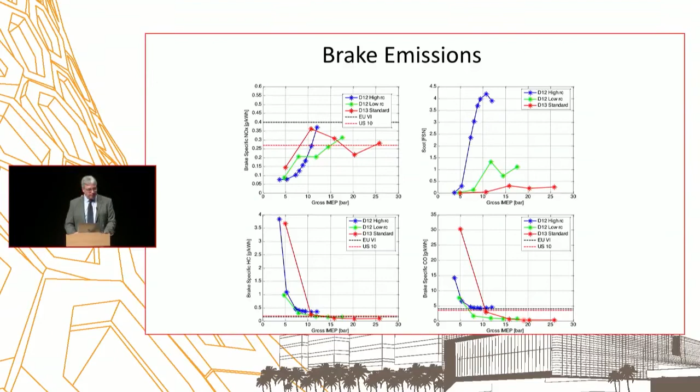Okay, yeah, there is also a little bit of a problem. We want really high dilution to get this really high efficiency. That means we want a really high inlet pressure. And at the same time, we're burning a lean charge with not very high exhaust temperature, and hence exhaust enthalpy. That means we're looking for a turbocharger that gives us really high boost with no exhaust energy to work with.

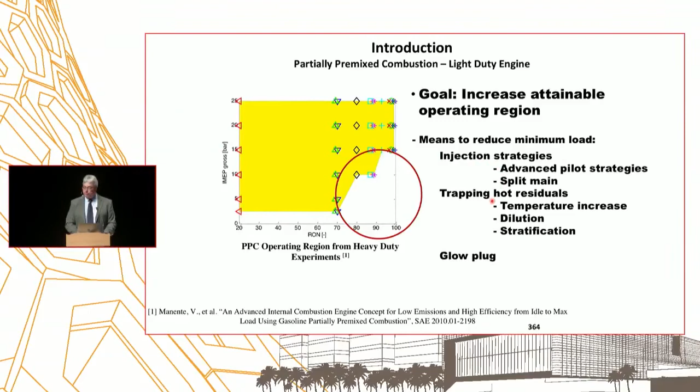The correct answer is: do not swap from gasoline to diesel, and then everything is easy. But if we cannot do that, how should we go about it? So it's this point here - how can we go down to this point here? Let's do that. What can we do? Well, we can do injection strategies, split injection, we can trap hot residuals like controlled auto-ignition, we can use a glow plug, and so on.

So this is a Volvo D5. It's a light-duty engine. We operated it with an active valve train, like this one here, so we can open and close the valves as we like from the computer. That enabled strange and interesting operating schemes.

Okay, this is the fuel, 87 octane gasoline, and this is the valve operating points. So we see that if we close the exhaust valve way early, we have a lot of recompression and re-expansion. And then if we inject the fuel here, we actually convert the gasoline to diesel - make it a lot more reactive.

We can inject a little bit here, a little bit here. The interesting thing is that if you inject every cycle, and get a little bit of heat release every cycle - is this a 4-stroke engine, or a 2-stroke engine? It's only doing gas exchange every other revolution, but you have combustion every revolution. 3-stroke? I'm not sure. Anyway, so this is how we did it, changing this NVO, negative valve overlap, and by that adjusting how much recompression we get.

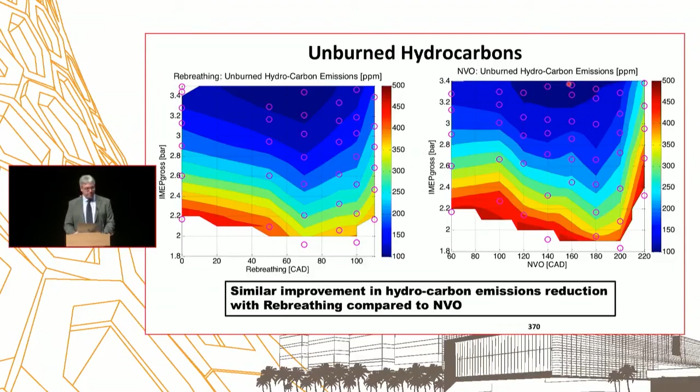And this is then injection at the wrong TDC, and let's do that and see what's going to happen. And so we inject and we release some heat. So combustion at the wrong TDC. So this is a different one with different setting, but still.

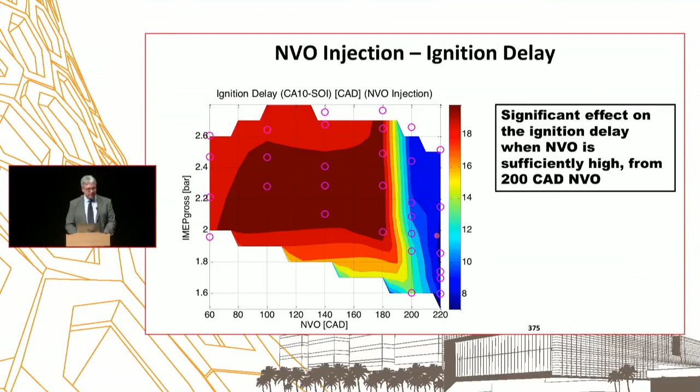You have to be careful so there is enough oxygen. So if you add too much fuel, there is not enough oxygen left. You're going to go really rich and generate a lot of soot in this combustion. And yeah, so this is the ignition delay from the main combustion as we add fuel in the wrong TDC. And we see that the ignition delay gets less here as we have a lot of NVO, meaning hot residuals, a lot of recompression, and yeah, add fuel there.

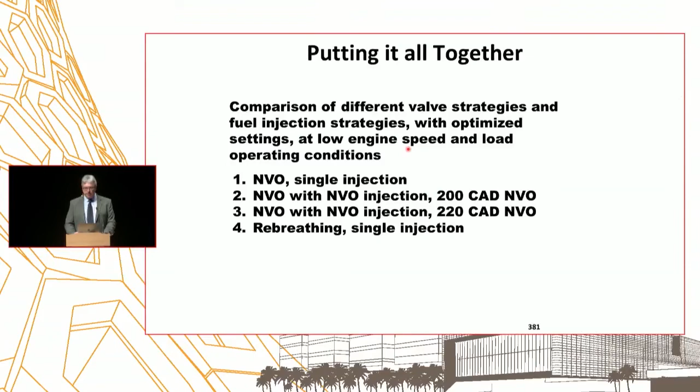In efficiency-wise, rebreathing is good, but we can't go as low in load. So we're not dancing as good of a limbo. Here we need to do these ones, but we then pay the penalty in efficiency. So do NVO here, do rebreathing here, and then we're good.

So I think that's kind of it. This is the first slide I showed you, the different combustion concepts. I gave you a little bit of HCCI information, not so much here, but maybe a little bit here as well, the PPC.

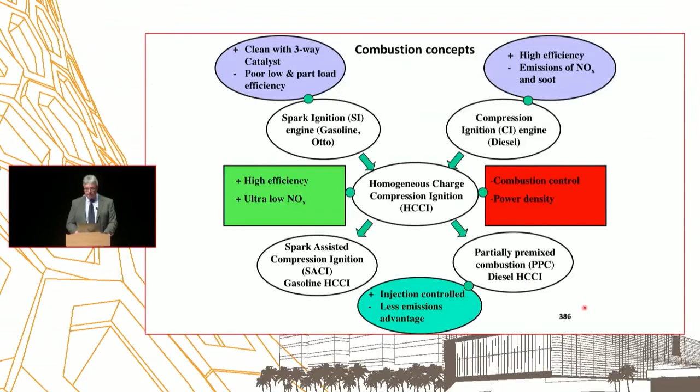As I said, this is the short version of the talk. There is a longer one. That is also taking the next step from PPC to the really high efficiency thermodynamics. But I guess we have to save that for next time.

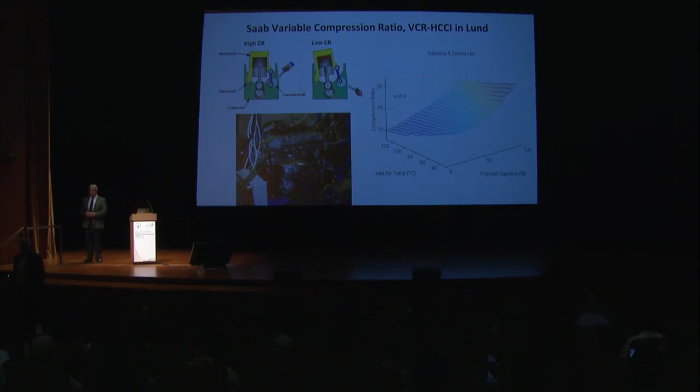60% is a good even number. I've seen Nissan indicating their goal is the same, Mazda said the same, and I think it was Honda or Toyota, I can't remember, but other companies too - so they're all aiming at 60. So is Cummins for heavy duty, as well as Volvo Trucks. I'm quite confident we're going to see that number in a reasonable time frame. It's not going to beat the gas turbine though, right?

We have a question from Facebook, from Alper Jonter. It says: Dear Professor Johansson, thanks for the lectures. I would like to learn your views about RCCI engines in comparison to HCCI engines and PPCs - which one do you think will be more useful for commercial vehicles in the coming years?

RCCI is a version of HCCI. It's a way of controlling HCCI with all its benefits and drawbacks. You can get extremely low NOx and soot, but you still have the control issues with closed loop combustion control and so on. PPC can be kind of a modified diesel engine, so it's much easier to get stable operation of the engine, but with a little bit less emission advantage.

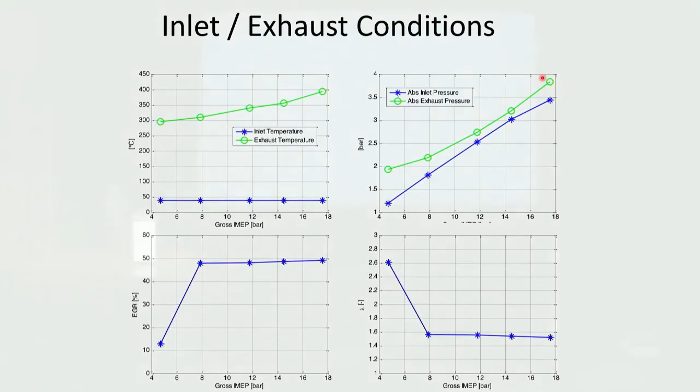So that was your last question. The intermediate one, how about combining HCCI with hybrid? Right? No. That's a bad idea, because HCCI is a part-load efficiency concept.

And I think I can show that by repeating one of the efficiency slides. Let's see where that is.